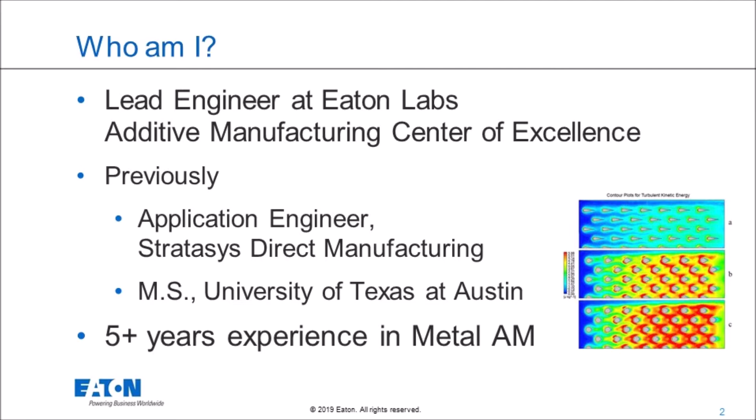So I'm the lead engineer at Eaton Labs, which is the corporate R&D part of Eaton, at the Additive Manufacturing Center of Excellence, which is where Eaton is doing all of its additive activities right now. Previously, I was an application engineer at Stratasys Direct Manufacturing, worked on aerospace, energy, turbo machinery applications. And previously, I got my Master's of Science in Mechanical Engineering at the University of Texas at Austin. You can see a little bit of my thesis research on heat exchangers for additive manufacturing there, and 5 years of experience in metal additive manufacturing.

In our industrial sector, we do hydraulics, vehicle filtration, and our aerospace units. So as part of the metal additive manufacturing initiative at Eaton, we're mostly working with our aerospace division. And so I'm going to be talking primarily about what we've been doing with aerospace here. So additive at Eaton essentially launched in 2016. In 2018, we got our AS9100D certification, which is an aerospace quality certification so that we can actually make parts for flight to actually go on planes. And we currently have 3 active aerospace production programs.

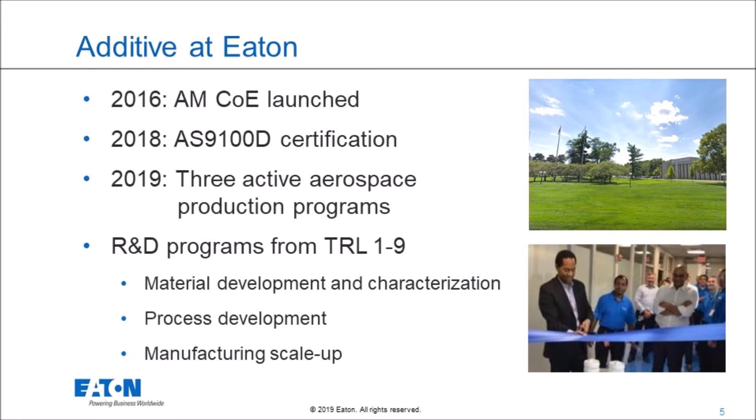So at the COE, we do TRL 1 through 9, so that's technology readiness level 1 through 9, going all the way from base level material characterization and development, through process development and up through manufacturing scale up to final end use parts. And getting more into the details, I'm not going to go too deep into this, but essentially 2011 to 2015, we're doing what everyone does when they start with additive. You know, you're making manufacturing floor products, prototypes, jigs and fixtures, everything like that.

Over the last 3 years, we've opened the COE and taken it to where we are now, which is we have 3 awards, 2 commercial and 1 military. The military award is for AIDC, it's a Taiwanese company, and one of our commercial awards, I can actually tell you this now, I'm happy to say, is with Airbus. And we are producing end-use parts that will go on planes, right? They will be flying by the end of this year, actually.

And I'm actually in the unique position of not really being here to sell you anything, right? Eaton is making parts for its customers. We kind of have our own initiatives within the company. So, I mean, if you'd like to work with Eaton, please come talk to me.

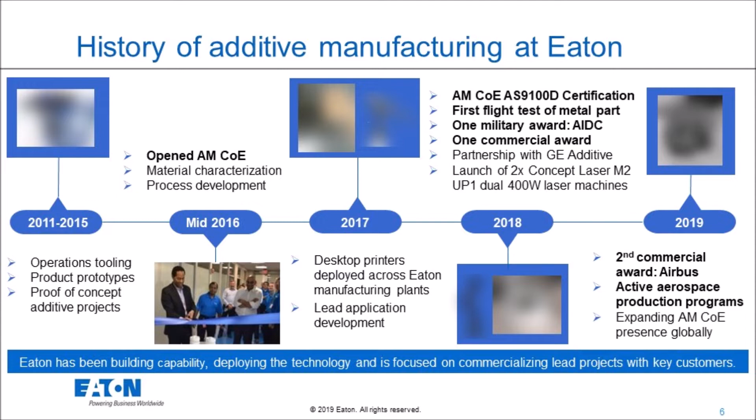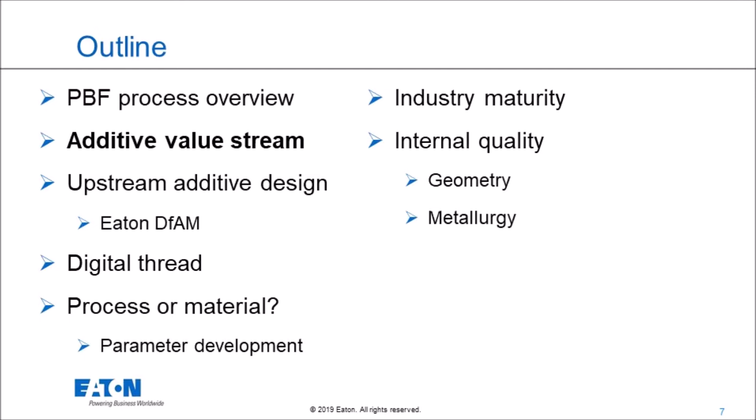But mostly I'm here to talk to you about how you scale up metal additive manufacturing to make end-use parts for aerospace. And so I'm going to talk to you about the powder bed fusion process. I think most people here are a little bit familiar with that. And I'll talk to you about the additive value stream, and this will inform the rest of the discussion today. The additive value stream in terms of what does that mean for prototyping and what does it mean for full production? And then I'll go a little bit deep, since we only have a half hour, into a couple of the different points along that value stream.

So powder bed fusion, in this case laser powder bed fusion. Also another point, I was informed by the legal team at Eaton that I couldn't use any copyrighted images from the internet, so I've recreated a lot of these images just for you guys, because I know you'd appreciate that.

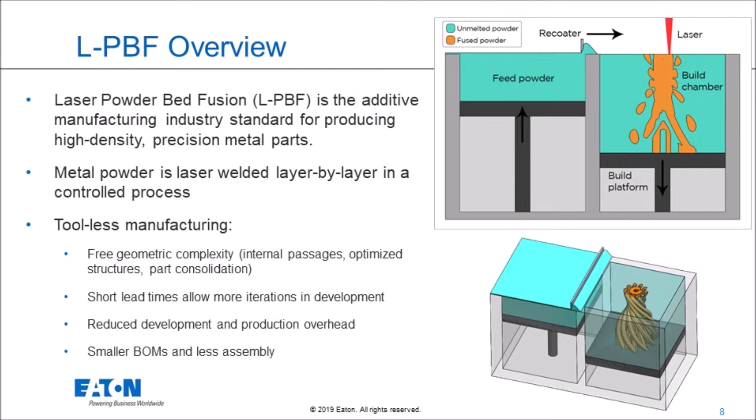So laser powder bed fusion, like most additive processes, it's a layer-based process. You spread a thin layer of powder across the surface. You hit that with a laser, and you melt one 2D layer of a part into the previously melted layers, and you build up a part layer by layer in that manner. You get all of the same things you get from all the other additive processes, which is almost free complexity. You can do internal passages, optimized structures, shorter lead times since it's toolless, reduced development and production overhead, and you get smaller bills of materials and assembly times.

So now looking at the additive value stream, and this is kind of the crux of what I'm talking about here, right? In the current state of things in 2019, if you have the capital, anyone can go out and buy a metal powder bed machine and make parts, and make good parts. The OEM of that machine, whether it's Renishaw or SLM or any of those companies, they'll sell you the powder, they'll give you the parameter sets for that powder and machine combination, and you'll make good parts, right?

So if you're making tooling, if you're making fixtures for your manufacturing floor, it's not going to be difficult, right? You will design the part, you'll print that part, maybe there's some post-processing, some machining to hit final dimensions, and you'll have that part on the floor. And you can do that fairly repeatably, right?

When you're talking about getting into serial production, especially for critical industries, so talking about biomedical, talking about aerospace, maybe turbo machinery or energy industries, it is not a linear progression to go from one part to making hundreds or thousands or tens of thousands of parts, and to be able to do that consistently and repeatably. So again, I'm not going to go into all these points, but trying to give you an idea of what you have to start thinking about when you go into production, right?

Starting from part selection. So how do you know, looking at Eaton, we have hundreds of thousands of parts that we make. Some are cast, some are machined, some are forged. How do you even go about looking at which of those parts should be made additively, right? Most engineering organizations are not equipped to go through that selection process. It requires some additive specific knowledge.

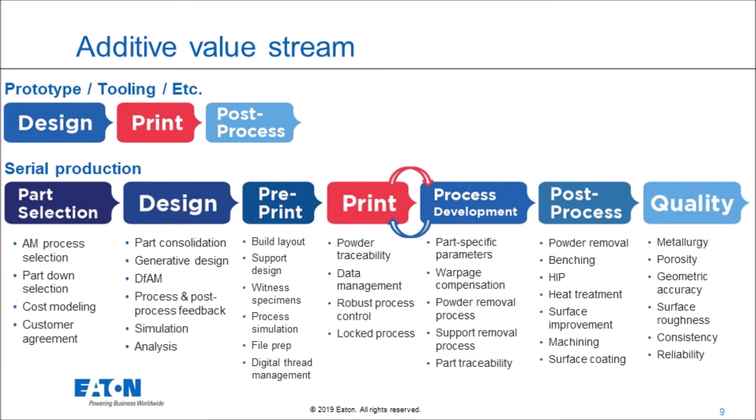You may have application-specific geometries or features, maybe thin walls, that require you to actually develop your parameter sets to make those parts well. So this becomes an iterative process of process development and printing, and that takes time and money that most people are not used to in the kind of prototyping tooling work stream. So now diving a little bit deeper into some of these individual points.

Talking about the additive design process, and if you take only one thing from my entire presentation today, please take this: inject additive manufacturing experience as far upstream as possible in the process. Many times we get parts at the AMCOE where I work from parts of Eaton where it's essentially a part that's been made traditionally. It's either been cast or it's been machined, and they say, can you print this? And the answer is, well, yes, we can print anything, but does it make sense to print this? It's probably going to be more expensive. It's not going to be better in terms of material properties.

So if you inject additive experience upstream in the process, in the design phase, now you can make parts that are lighter, that are cheaper, that are more effective or optimized for the application that they're for. And it also requires multidisciplinary teams, because when you're talking about creating an additive part in metal that has supports on it, right? How are you removing those supports? Can you remove the supports in a way that doesn't add a step in manufacturing, right? Can you add supports, and can you add post-processing steps that don't add to the quality overhead that you have on this part?

So if you wait until you've already designed the part to bring in your quality and your manufacturing and your post-processing specialists, essentially, you're losing potential efficiency gains and optimization on that part. And really the point being is that small design changes and small inputs from these experienced people can have large effects downstream in terms of time, in terms of cost, and in terms of process efficiency. And most design engineering organizations are not equipped for these next generation workflows.

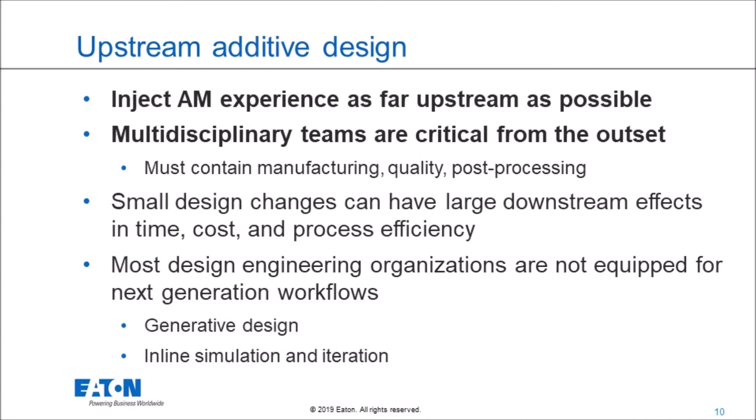And so, case in point from Eaton, I'm actually really excited to be able to share this with you. We announced this part at the Paris Air Show last week, so I actually didn't think I would be able to. This part that we're looking at here, which is in the as-built state, is a ram air valve assembly for the AIDC Corporation, which is Aerospace Industrial Development Corporation, something similar to Taiwanese corporation. This is actually an assembly.

This part actually goes into kind of the hole here. It's machined and there's electronics added. It is on the outside of a jet, and it opens in the event of emergency and allows air intake into the cabin. So we reduced development time by 75%, consolidated 22 parts into one additive component, and that eliminates seals, it eliminates threaded joints, and it eliminates potential leak paths for this part that's on the outside of a plane. And we reduced part weight by 10%.

These things are not possible if you just take the original design and simply try to 3D print it. You need to actually change that design and optimize it for the process. There's another part that I would love to be able to share with you. I can't right now, but look for that in the very near future.

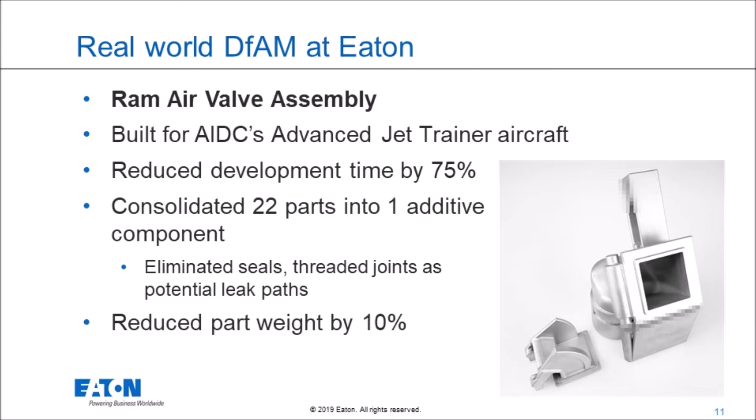So now talking about digital thread. This is a buzzword that you've probably heard at this conference before. And the digital thread is basically the fact that when you take an additive manufactured part, it's not just the part sitting on the table. That part is actually one node in a long thread of digital manufacturing that has occurred both before you've made the part and once you put it in the field.

And again, most engineering organizations are not equipped to deal with the amount of digital data that is created and that must be archived during this process. Looking at aerospace specifically, traceability is a serious concern in aerospace, and traceability both ways. So if a part fails in the field, look at the Boeing aircraft, you need to be able to understand what build off the printer that came from, what powder lot did that build use, and what original lot of material did that powder come from.

And going the other way, if you find out that one powder lot of material that you used to build your parts was bad for some reason, the chemistry was off or the powder size distribution was off, you need to be able to go into your software essentially and know every single part that you've made that came from that powder lot.

So looking at this thread through all of these nodes, it starts in design, goes through the parametric CAD and the drawings and tolerancing, through simulation and analysis, design iteration, parameter development, part development and testing, support design, build layout, additive process, into your application-specific processes for that part, and then into the quality and inspection applications that you're doing. Now the part's in the field, you may have sensors on it, you may have data coming out, there's maintenance, there's inspection and repair, and eventually part end of life when it's retired.

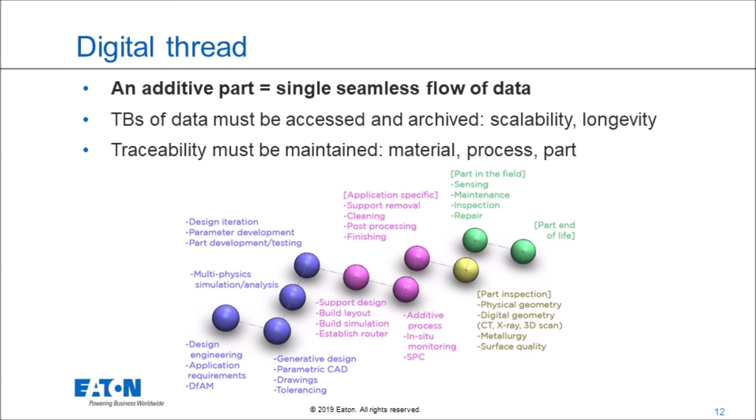And as just one point in the digital thread discussion, I have vector versus raster here. If you've worked in 2D images in Photoshop or graphics, basically a vector is something that is defined mathematically, and a raster is something that is defined as like a bitmap. And the analogy here is something that you design in a CAD program like SolidWorks, where a sphere is mathematically defined, it's a sphere, versus when you export to an STL, what you get is a triangulated mesh.

And I hate STLs. I hope that they become completely irrelevant to the additive manufacturing process, and I hope that this slide is irrelevant for everyone here in a couple of years. Right now, in many of the workflows, if you use Materialise Magics and some of the other programs, you have to use STLs.

So the question then is, how do you control this conversion from a mathematical object, a surface-defined parametric CAD object, to what is essentially a bitmap, more or less? It's a triangular mesh. If you were to try and 3D print a sphere like this, you'd probably see the facets on it, and you'd understand that, wow, I probably should have exported a higher quality object. But the difference between these two objects, maybe you can't see that when you print it.

But do the edges that you've created in this STL affect the fatigue life of your object? Do they affect maybe the fluid flow around a roughness on your surface? And then you also have, again, the data management. So this is 25 megabytes, this is 100 kilobytes. And if you're printing 100 of these on a plate, you've now exponentially increased the amount of data that you have to store and access through the whole lifetime of the part.

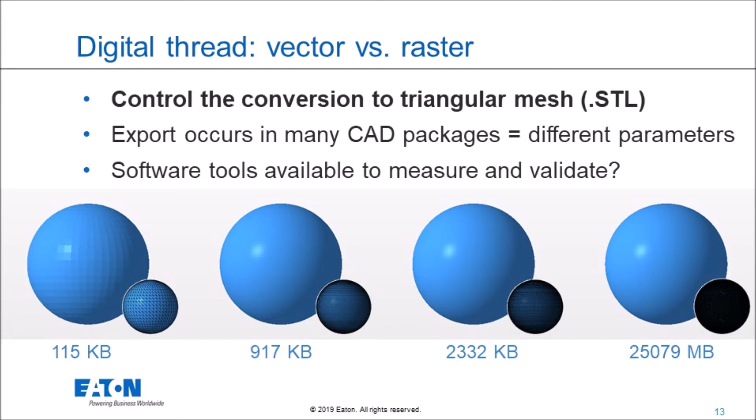So now, looking at the actual additive manufacturing process itself, there are analogous processes where the way that you're making the part affects the material properties. Looking at casting, the way you cast the part determines the type of porosity. Or metal injection molding, the amount of pressure, the amount of heat, that determines the part. But in laser powder bed fusion, the key is that the process is the material. The manufacturing process creates both the geometry and the material properties simultaneously.

Looking at the process itself, this is the details of the laser powder bed process. It's very dynamic, very chaotic, and very stochastic, which means that you get slightly different results every time, and you have to control this process very well in order to get the same part every time. You have slightly different distributions of particle sizes and gaps in the powder bed itself. When the laser hits and creates this melt pool, you have a cavity here, which is actually a depression in the melt pool.

The liquid in the melt pool is recirculating through Marangoni flow. You have a solidification front. You have a vapor plume coming off and throwing powder into the air. You have spatter particles, which are partially melted, flying out the other way. And actually, I don't have this on here, but in some of the more recent papers coming out of, I think, Lawrence Livermore National Labs, they have a synchrotron, and you can see this process happening in real time in slow motion.

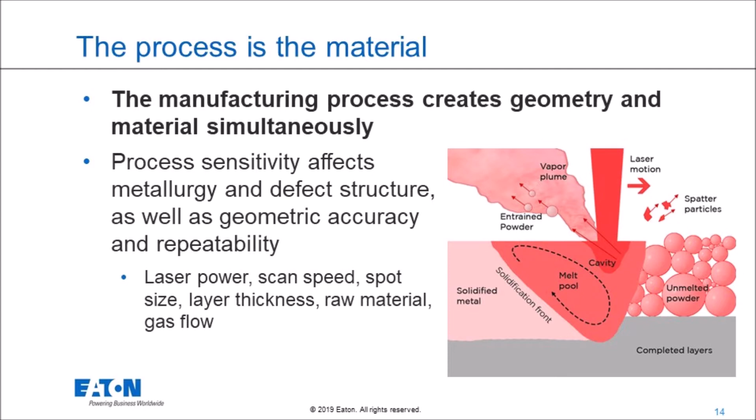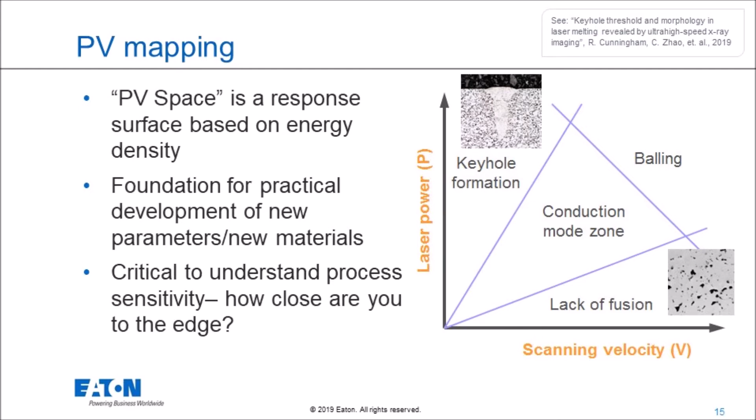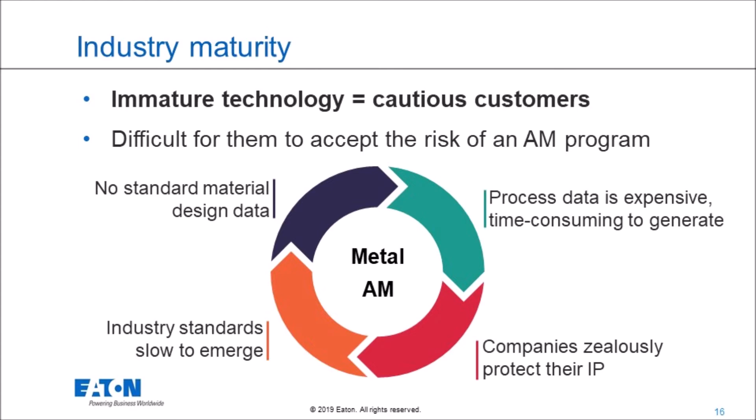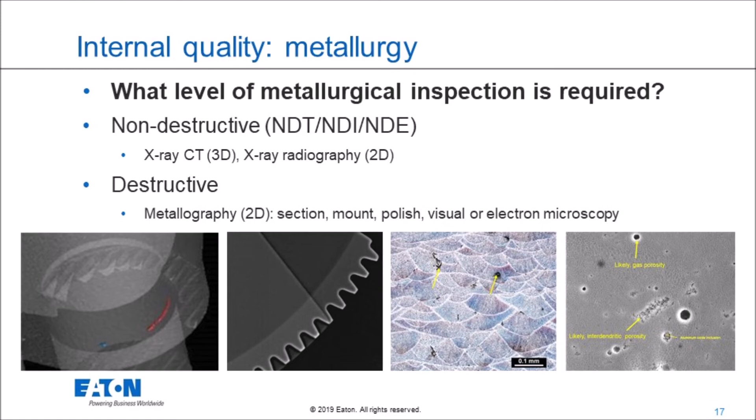So first things first, how do you remove the powder and how do you ensure that the powder is fully removed? If you take a part with powder still left on the walls and put it through a heat treat cycle, that powder can sinter to the walls, and now you have risk of FOD, which is foreign object debris, flying off into your fuel line and causing damage. And aerospace companies take this extremely seriously.

How do you ensure geometric accuracy, so that the wall thickness you've put through your finite element analysis and done all your stress analysis on is actually accurate, that the wall is not too thin? And how do you ensure that the surface finish in these internal passages is good? We know that the build angle changes the surface finish, and that's going to affect both the fluid flow and the fatigue life of that part.

So these are all fairly open questions in the industry, and I don't have any answers right now, but these are the kind of things that you have to think about when you go into production on these metal parts.